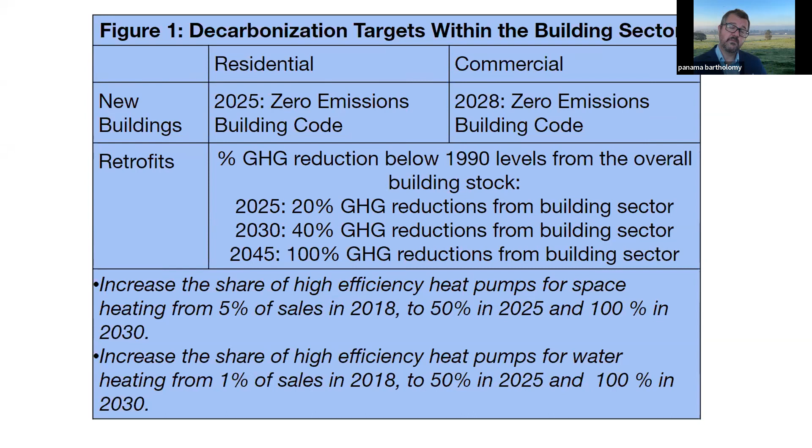And that the state of California should set a date. We recommended 2030 for when the state should start phasing out the sale of gas appliances. And we set this based on the state's goal to get to carbon neutrality by 2045, and recognizing that your average water heater, space heater has a life of about 15 years, give or take. And so if you're going to be installing any gas equipment after 2030, it's going to be hard to meet that 2045 goal. Next slide, please.

In order to get that done, we laid out 5 different major overarching market and policy goals that we think need to be achieved before you can bring about this major transition off of gas appliances in buildings. 1, we need to dramatically scale up awareness of the benefits of building electrification across all stakeholder groups. 2, we have to make sure that electrification is a good customer experience, particularly on the financial side, that customers from a capital perspective as well as an operating perspective are getting a good value proposition out of building electrification.

3, we actually need to build sustainable markets for businesses to be able to make money off of electrification. And this is a transition market. And so we're transitioning very likely, mostly people that are already working in gas over to electricity. And we need to make sure that people are able to make money, and preferably more money, doing electrification than putting in gas appliances. 4, we need to make sure that we have a supply chain that can meet the demand that we're going to be creating.

Climate change forces us into a situation where if we're going to meet our goals, we're going to have to be renovating and retrofitting gas appliances at a faster rate than the natural turnover that we would normally have with appliances. And so how do we work with the supply chain to make sure that they are ready and that we're getting barriers to the supply chain out of the way, such as undersized electrical panels and permitting delays.

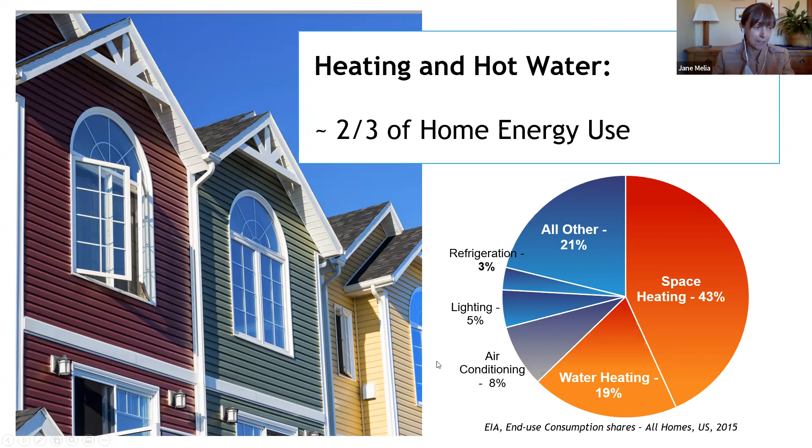And if we can tackle that problem, we'll have the single biggest impact on the impact of our homes on the climate. And so it's really important that we figure out a way to do that cost effectively and at scale. It's worth noting that when we think about gas in buildings, and that's been the focus of a lot of discussion, a lot of great policy measures recently, the vast majority of what we're talking about is really heating and hot water again, around 90% in California, for example. So again, if we can figure out a way to comfortably and cost effectively swap out the gas heating and hot water in our buildings, we're going to really help have a huge impact.

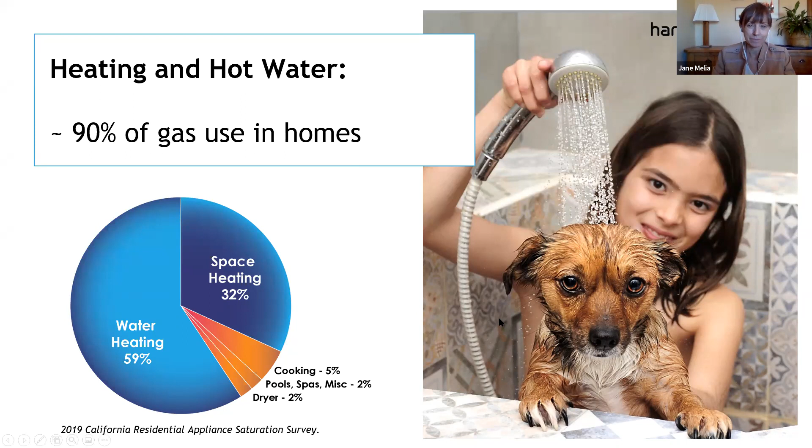Now, heat pumps are the true heroes of this story. Their ability to move heat rather than generating it means that they deliver far more heat into the home than they consume, delivering rated efficiencies of well over 100%, as high as 500% in some cases. They sip electricity gently while delivering reliable heat to the home. So they can be ground sourced, water sourced, or just simply and most commonly air sourced. They really knock it out of the park in terms of efficiency. And that's the most powerful and amazing tool we have to decarbonize buildings.

But there are barriers to scaling heat pump adoption. First of all, there's the issue of costs. How can we deliver compelling cost reductions compared to gas to enable that mass adoption? How can we transition to electricity while reducing people's energy bills? And how can we electrify without requiring 2 heat pumps, one for space conditioning and one for hot water? And can we do it without triggering the need for panel upgrade or for refrigerant lines in the home?

Then there's the issue of the timing of energy use. Can we deliver heat electrically without aggravating the duck curve and increasing grid costs? Heating in particular is very time driven, with most heating needs in the morning and to a lesser extent in the evening. If you put that on top of the duck curve of costs and emissions, heat pumps that operate without storage tend to increase demand just when electricity is more expensive to produce, increasing the peak loads, particularly mornings in winter. And it's not able to take advantage as much as we would like from that low cost, clean midday electricity. And finally, how can we electrify homes without increasing the emissions of refrigerants that have high climate impacts?

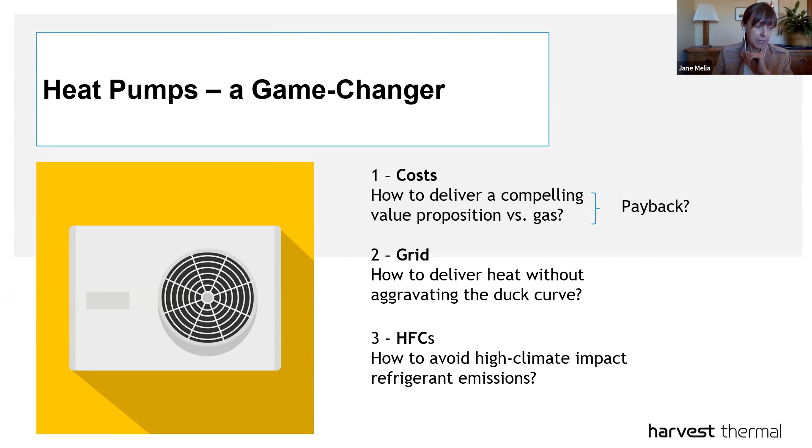Now, let's go back to the Harvest system and discuss how we have tried to tackle these challenges. So the Harvest Thermal Pod is an IoT system controller. It's about the size of a large shoebox. It fits on the wall of a garage, mechanical room. It's also sized to fit inside a tank closet. It integrates our control unit and software, physical controls, pumps, sensors, flow meters to accurately orchestrate the operation of the whole system.

It operates that heat pump when electricity is cleanest, cheapest, and most abundant, saving on energy bills for the homeowner and on carbon emissions for all of us. It also operates that heat pump most efficiently, for example, in the middle of the day when it's warm and heat pumps are more efficient. That heat pump delivers water at high temperatures to a storage tank, and we operate this tank as a thermal battery, constantly managing its state of charge with a high level of precision and visibility to completely decouple the heat pump operation from heating delivery.

Now, we sometimes refer to Tesla cars as computers on wheels, and we're not the scale, of course, of Tesla, but you can kind of think about this as a computer on a tank. The system is very smart, it's integrated, it's cloud connected for over-the-air upgrades, with machine learning to optimize that heating delivery to the homeowner's needs.

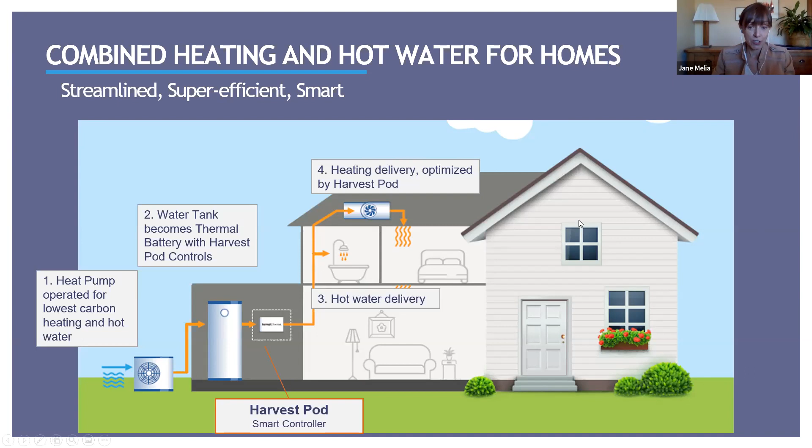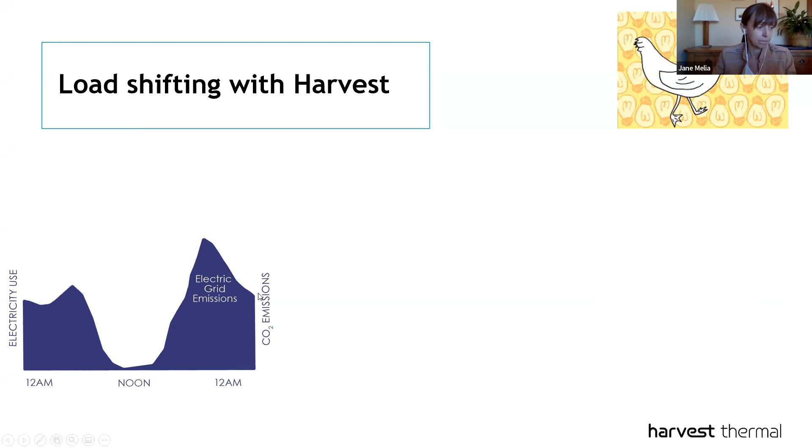Now, the challenge that we saw earlier when heat pumps are moving in to replace gas, which they need to do, was that when they operate instantaneously to heat the home, they aren't really able to benefit from the duck curve. They're not reducing emissions as much as they could, and they're increasing peak loads on the grid, which in many places will increasingly occur on winter mornings. Now, wouldn't it be great if we could somehow operate with an inverse duck curve?

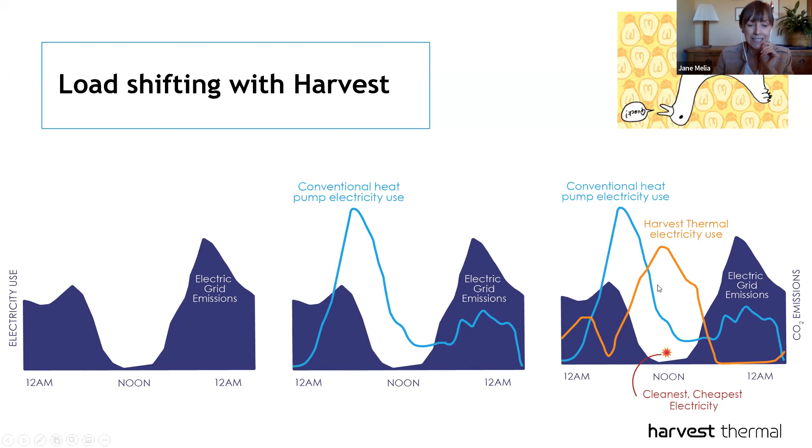Well, that's exactly what the Harvest system does. With the vast majority of the electricity that we use shifted to the middle of the day, we basically shift electric load from peak to off-peak, and not just for hot water, but for the whole heating and hot water load, the inverse duck curve. And that means that we always capture the cleanest, cheapest electricity, reducing user costs, supporting an affordable, clean energy grid.

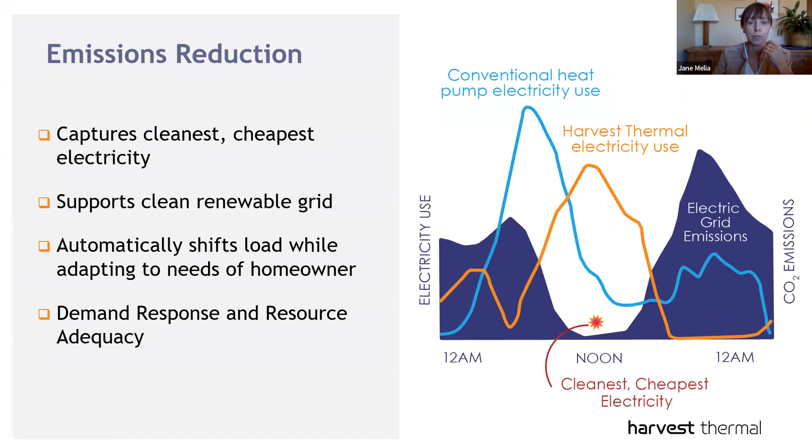So what does that deliver from a practical perspective? Well, here is some data from the operation of our Harvest homes, ranging from 1,300 up to 3,100 square feet, from 2 to 6 people. Our systems have delivered carbon reductions compared to gas by over 90% and by about 50% compared to standard heat pumps, enabled both by super high efficiency and by load shifting.

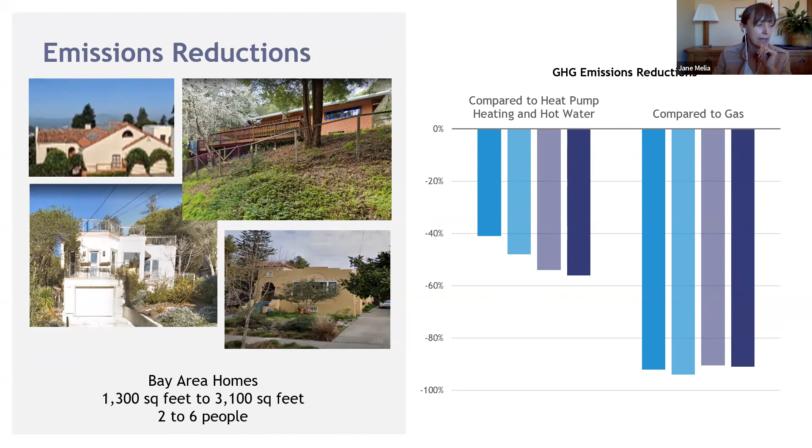And what about affordability? Well, we've substantially lowered energy costs. And I believe we're the only system on the market that delivers really a compelling value proposition in terms of cost compared to gas. The Harvest system is also streamlined. One heat pump to deliver heating and hot water, a standard tank, and standard distribution via forced air or radiant floors, plus of course the Harvest pod.

The heat pump we use requires only 15 amps. None of the homes we've deployed in or are currently planning to deploy in have had to do a costly panel upgrade, which you typically need when you're deploying 2 heat pumps for your HVAC and your hot water. And we have no refrigerant lines in the home. And of course, we've designed the pod to be as compact as possible. We want this to work not just for big homes, but for small homes as well. It fits above the tank, inside a tank closet.

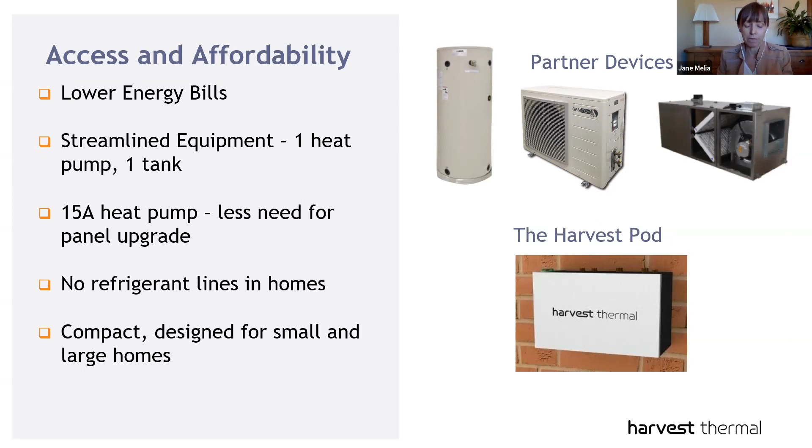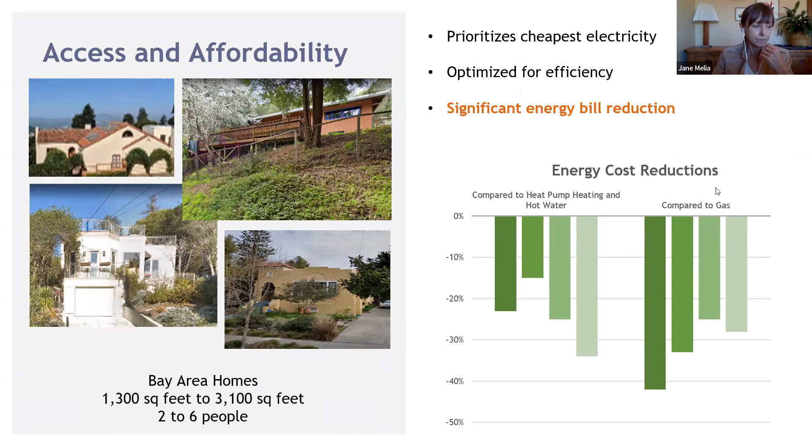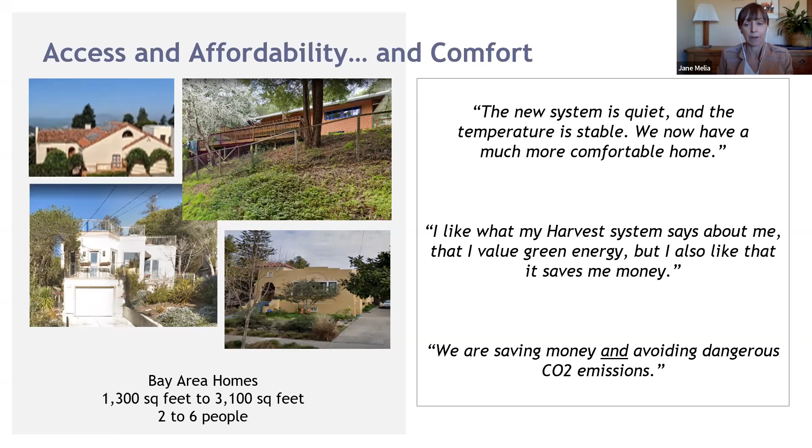So concretely, here's some data on the energy bill reductions to these homeowners achieved when on time of use rates. It's by about minus 30 to 40% compared to gas and about minus 15 to 31% compared to regular heat pumps. This is achieved by a combination of really high efficiency operation as well as that load shifting, delivering a positive payback even without incentives. Most importantly, it delivers super stable temperatures and lots of quiet, comfort, and very happy customers. And of course, reliable heating and hot water.

Finally, for the question of refrigerants, we use the Sanco2 heat pumps with CO2 as a refrigerant. It has a global warming potential of 1. Most heat pumps being deployed have a global warming potential of over 2,000. So you can see the difference there.

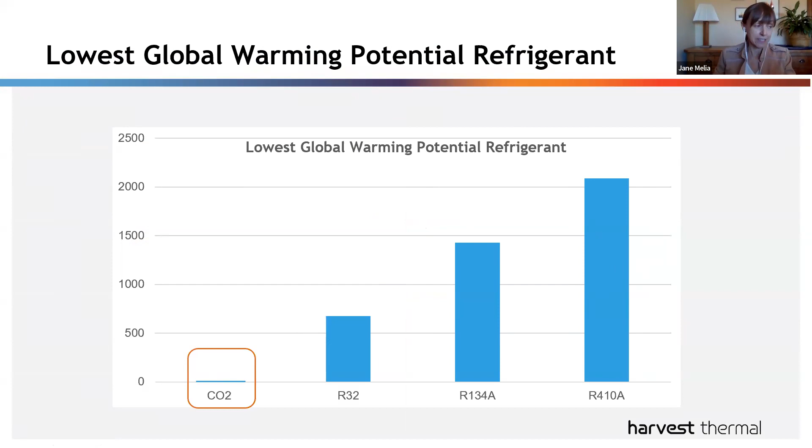Now, some of you may be wondering a bit about the how behind this. So I'm going to geek out a bit for the next 3 slides. Please bear with me. So first of all, you may be asking, how can we use a 1.25 ton heat pump to deliver the heating and hot water load of a 6-person, 3,100 square foot home? Well, this is enabled by using a thermal battery whose storage capacity is equivalent roughly to that of a Tesla Powerwall to buffer the heat pump, and by the precise operation of the state of charge of that battery.

This chart shows the heating load of a home on the coldest day in winter in the Bay Area, a mid-sized home in San Mateo County. And this has a huge peak in the morning, 3 tons in this case. But the average load over that day for heating plus hot water averages less than 1 ton.

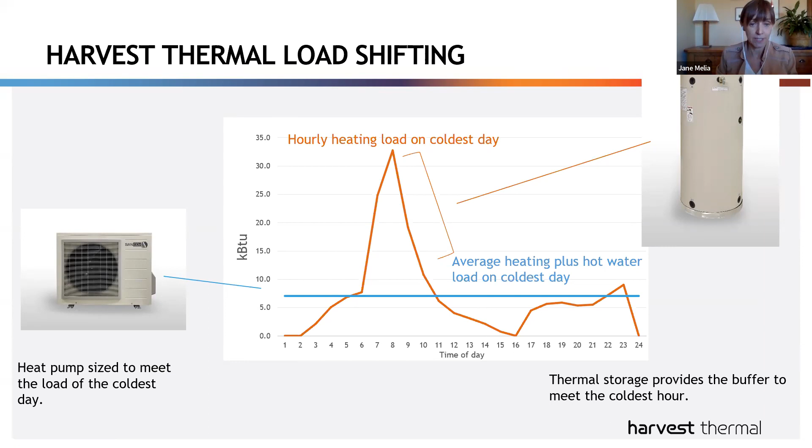So you can size your heat pump to deliver that average load as long as you can manage your tank accurately enough to store that hot water and deliver it when needed. So the tank is sized for the peak hour, the heat pump for the peak day. Also, by storing the water at high temperatures, in this case 150 Fahrenheit, we're able to stick to manageable tank sizes. For the homes we're currently deploying in San Mateo County, these are all 119-gallon tanks.

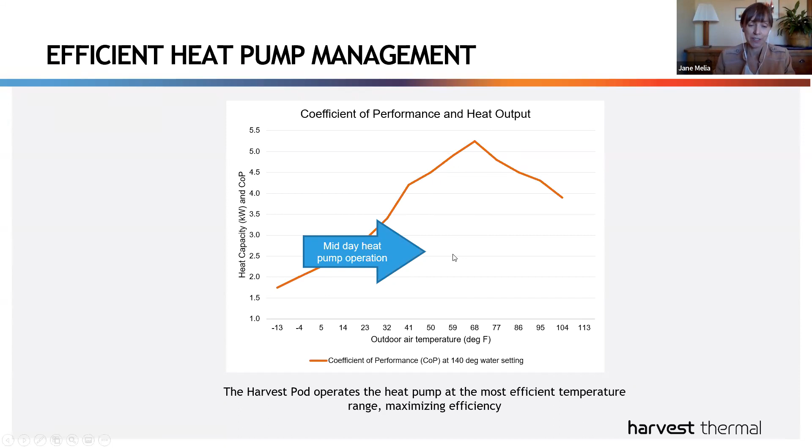Now, because we can decouple the timing of operation of the heat pump from heating delivery, we can choose to operate the heat pump not at say 32 degrees in the coldest hour of the mornings, but more toward the middle of the day when even in winter we might hit 45, 50 degrees. And this is what we do to really enhance the efficiency. That's one example of how we build a highly efficient system.

Now, there are many other things going on in the system for optimized performance, really a lot of different elements we're focusing on. But the net is it gives us very high field measured efficiency compared to most systems. From soup to nuts, from that heat pump operation, including thermal losses, the operation of our pumps, fans, controls, and everything, we have a field measured performance efficiency over 6 months, including winter and the early summer, of about 3.1. This is among the highest seasonally adjusted COPs for high performance variable capacity heat pumps, without taking into account the fact that many of those are measured in the lab.

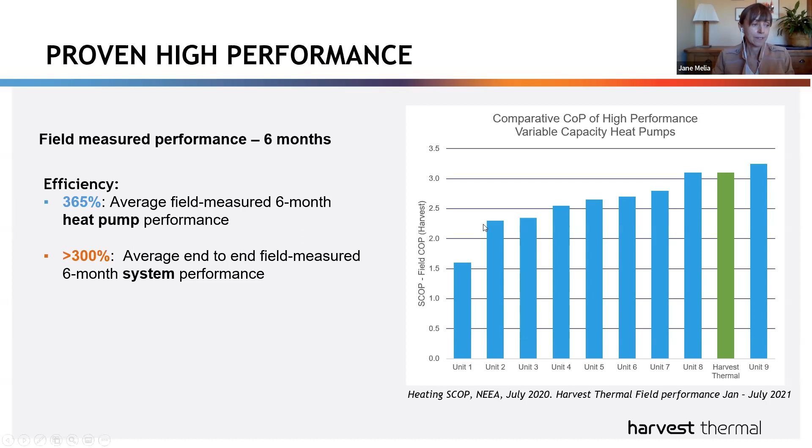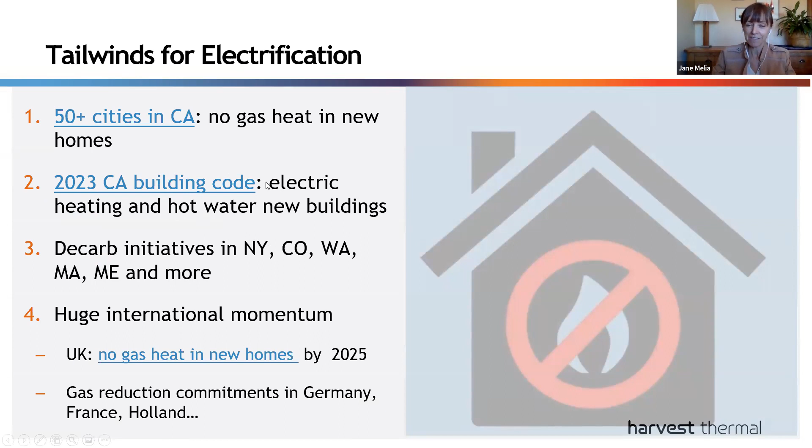So I just want to close with two last points. First of all, we're at a really important moment in the decarbonization movement, with strong tailwinds of awareness, emerging incentives, regulations across the US and around the world, and of course, new technologies to meet different needs. So I want to shout out to everybody in the audience who's really helped make this happen. Building tailwinds that together will allow us to really make the change we need. In fact, 54 cities in California, I believe about a year ago, we were about 34, is that right?

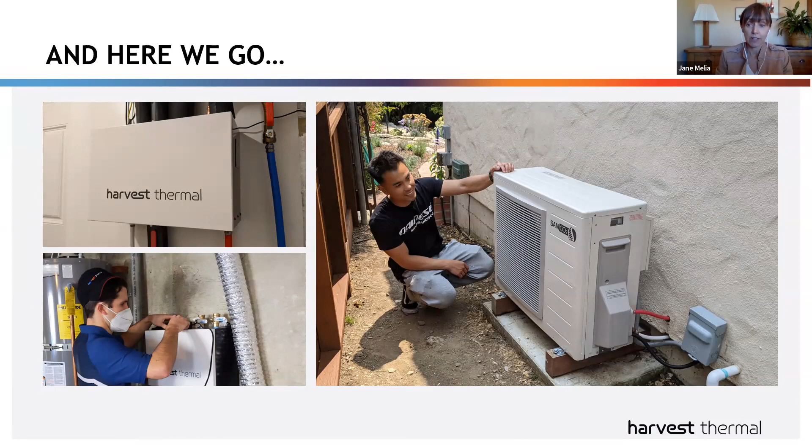Finally, here are some photos of our systems in place and being deployed. So I'm very pleased to announce today that we are launching commercially this week, with our first commercial installations underway right now as we speak. This is a progressive rollout focused on the California Bay Area, and we're always pleased to add homeowners in these locations to our waitlist, expand our pool of trained contractors, and grow our team.

And I wanted to shout out here to Air Care and DG, who have trained all their contractors and they're currently deploying our systems, as well as some of our strong partners. And there are many, but a quick shout out to Franklin Energy, AEA, with whom we're deploying projects in the Bay Area, Eco2 Systems, which are delivering, of course, those super amazing heat pumps that we're able to benefit from. And of course, Peninsula Clean Energy, who is sponsoring some of our projects.

Finally, we're super excited with the support of everybody who's contributing to the piece of this puzzle to be able to deliver on affordable, scalable, and super low carbon home comfort. Thank you for your attention.

Jane, so good. Are you sure you have an engineering degree? Because you are an excellent communicator. Apologies to all the engineers in the crowd. Seriously, wonderful presentation, amazing technology. It's a good thing you saved a lot of time for questions, because there's a lot of questions. And so I'm going to go through a bunch of them.

I may ask some folks to ask them themselves, but there's a lot of questions about cold weather in here, and cold weather applications of Harvest Thermal, your unit. So can you talk about your plans for cold weather work, how it would affect the efficiency?